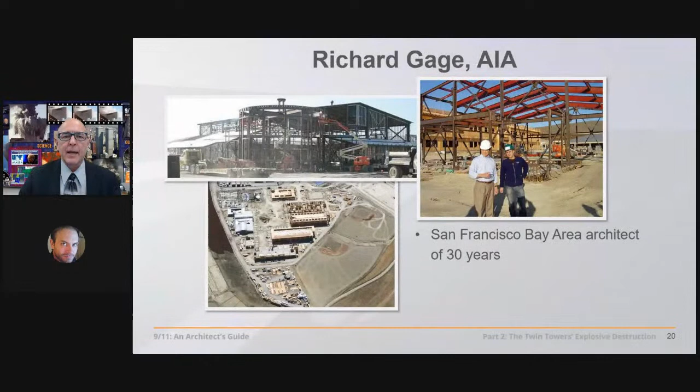Thanks, Andy. And just so people know something about my background: I was responsible at a local firm here in the San Francisco Bay Area for the construction documents for these $3 and $10 million gymnasiums, and the construction administration for this $125 million high school. More recently, before launching full-time into this important outreach effort, I had similar responsibilities working on this $400 million mixed-use project near Las Vegas, with 6 blocks of retail, mid-rise office space, and parking structure—altogether about 1,200 tons of fireproof steel framing.

I now work full-time educating architects, engineers, and others to understand what really happened at the World Trade Center, using the material in these courses. So with that in mind, let's get right into it.

The Twin Towers—some, in terms of its design, called it the crowning achievement of the international style. Others called it heartless modernism. Robert Stern, famous architect, calls it gigantic dumbness, right? You just extrude 2 squares until they become the tallest buildings in the world, outpacing the Empire State Building, which was the tallest building in the world at the time of the construction of the Twin Towers.

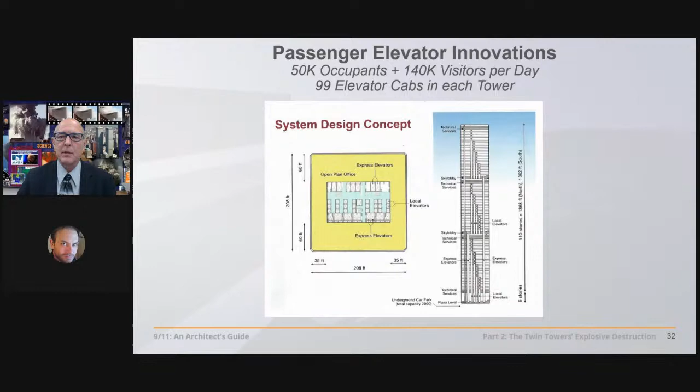That aside, we have some incredible engineering innovations, not the least of which was the passenger elevators, which got 50,000 occupants, with almost 100 elevator cabs in each of these towers, to their destinations in a series of 3 stages. They would go up to the first, second, and third stages. Quite novel—we have an incredible occupant load in these towers that they were designed for.

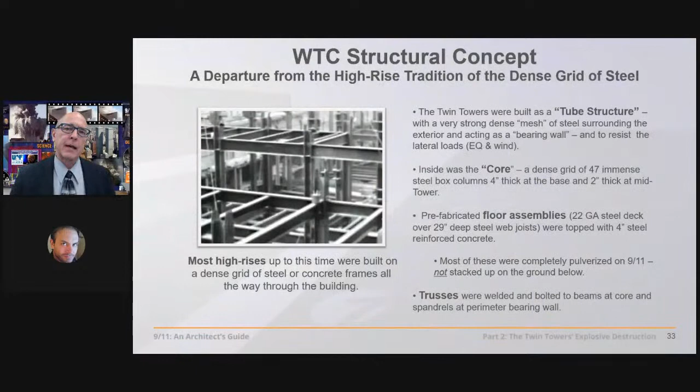Anyway, some said they were empty, half empty near the time of the collapse. But even more impressive is the structural engineering, because up to this time we had a forest of columns in these buildings, including the Empire State Building.

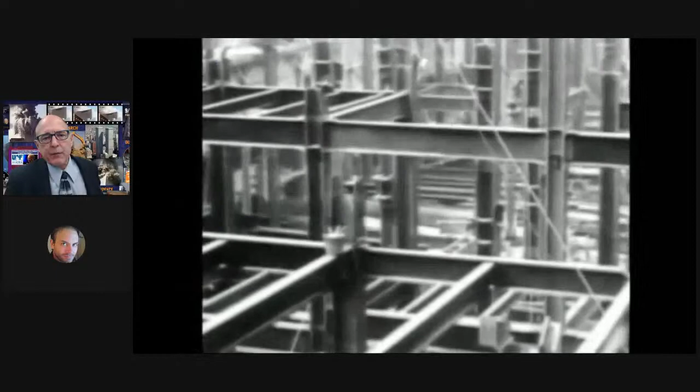But with the Twin Towers, what happens is we have prefabricated elements, 3 columns by 3 spandrel panels welded in the factory, brought out and set with the cranes and bolted in place. They had moved half of the columns out to the outside, as you see here. And then on the inside we had a massive series of 47 incredibly large and robust core columns, up to solid steel at the base. And then between these two different structures really spanned these lightweight steel trusses.

Now, these were the vulnerable trusses, vulnerable to fires, as claimed by NIST, the National Institute of Standards and Technology, who was tasked by Congress to explain these collapses to the American people. So we'll be looking at that in some detail today. Over these lightweight trusses were poured 4-inch thick concrete slabs. So it's really quite a structure.

We're talking about an acre size in these buildings, with 60 feet of open office area on two sides, and 35 feet on the other sides. That in itself was quite an innovation.

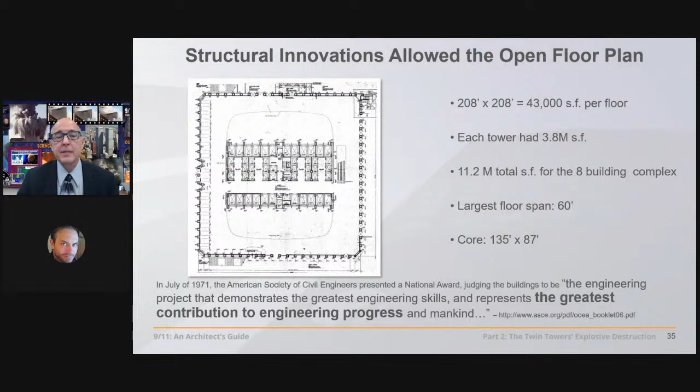As you can see here, most all these floors were open, and they were allowed by these steel trusses. This hadn't been achieved before. That forest of columns really impacted the planning of the tenants' office spaces.

Now, on the outside, what you see is a series of marching columns all the way around the building. In the 80s particularly, these views started increasing without all these columns around the outside as structural innovations continued. So some likened this to a jail cell with bars all the way around, after the 80s and 90s particularly.

It also had lower ceilings than most skyscrapers, at 9 feet here, given the long space particularly. And they were requiring mechanical, electrical, and communications updates in these buildings, and the asbestos was required to be abated. So you had what amounted to a $5 to $10 billion requirement of updating these buildings.

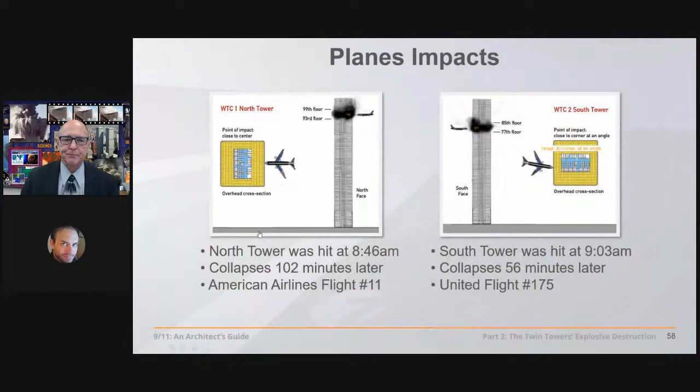So there were investigations into the structural failures here. The American Society of Civil Engineers put together volunteers who worked themselves into subsequent investigations like the FEMA report, which finally had $600,000 worth of funding, but their efforts were quite hampered. According to the New York Times, they couldn't get access to the site, the blueprints of the buildings, the steel, appealing to the public for photos and so forth.

NIST took over the investigation from FEMA, who basically called it a pancaking collapse. NIST took another 3 years and had $20 million worth of funding. NIST is part of the U.S. branch of government under the Department of Commerce, so it's not an independent analysis whatsoever.

Their theory? Column failure. Nearly all the columns failed at once on the outside perimeter of this building, the perimeter structural steel frame. They said that was due to the massive fires at the time of the collapse, causing the floor trusses to sag. When they sagged, they pulled in the columns. The problem is that sagging floor trusses don't cause, can't cause, the pulling in on these 14-inch square steel tube columns.

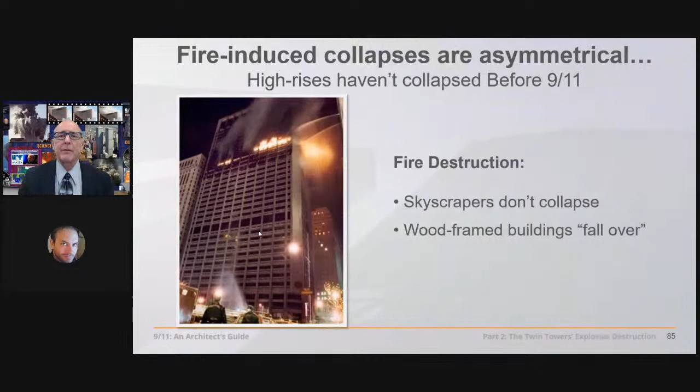We haven't lost a skyscraper, but in wood frame buildings, we'd expect that building to fall over if it was going to fall at all. Not straight down through the path of the tons of supporting structure underneath that's not even on fire, but it might fall over. What about steel frame buildings?

They built an 8-story steel frame building just to see what would happen when they put 2,000-degree fires on it, fueled by incredible fuel loads, trying to get those temperatures up to 2,000 degrees Fahrenheit. They set it on fire, and by the way, some of the steel beams were fireproofed, some of them were not.

And let's see what happened. This was the largest test of its kind ever conducted. It showed how unprotected steel can be distorted, even by a normal office fire. But as is typical in steel buildings, the structural beams only slowly and progressively warped and sagged. There was no chance of a sudden collapse.

In over 20 years, I have not seen, until recently, a protected steel structure that has collapsed in a fire. Until recently, of course, we're referring here to 9/11, when we had not 2, but 3 protected steel structures collapse in one day due to uncontrolled fires, as we're told. So this is getting really important.

The summary of this incredible report says it's inherently stable due to the highly redundant nature of the structural steel form. So the connections don't fail. This is extremely important. As we saw last week, the connections in NIST's computer model failed at a rate of 400 per second.

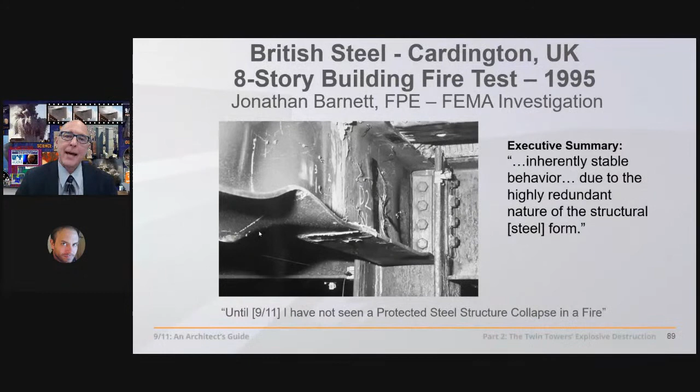The beams might sag when they reach the 1200-degree critical temperature. But there's a history of much hotter, larger, and longer-lasting fires in these structures. Let's take a look.

May 4th, 1988, the First Interstate Bank, a 62-story building in Los Angeles, California, suffered a 3.5-hour fire which burned across 5 floors and caused an estimated $200 million of damage. It did not collapse.

February 23rd, 1991, the One Meridian Plaza, a 38-story building in Philadelphia, suffered an 18-hour fire which burned across 8 floors. The fire caused an estimated $100 million worth of damage and 3 firefighters died fighting it. It was later described by officials as the most significant fire of the century.

It did not collapse. October 17, 2004, the East Tower of the Park Central complex in Caracas, Venezuela suffered a 17-hour fire which spread across 26 of its 56 floors. It did not collapse. August 18, 2007, a fire broke out on the 17th floor of the Deutsche Bank building

in New York, a building undergoing deconstruction after being heavily damaged by debris from the South Tower on 9/11. Originally 41 stories in height, it had been reduced to 26 at the time of the fire, which lasted 7 hours and affected a total of 10 floors. 2 firefighters died of smoke inhalation. It did not collapse.

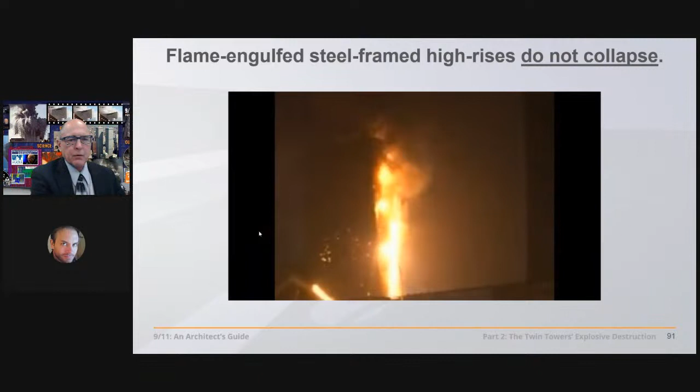So, even after 9/11, we have several fully engulfed high-rises that have not collapsed. Very important precedents. So what happened on 9/11?

These fires brought this building down in a manner in which we're going to be looking at today, fast. You can see why architects and engineers are taking a second look at this, at least.

And here's some natural collapses, in this case, earthquakes. These buildings fall over to the path of least resistance. That's what we might expect in a natural collapse. The law of entropy, increasing chaos, it falls over. But the columns and beams are not severed one from another. The concrete is not pulverized to a fine powder, as we'll see happens at the Twin Towers.

These buildings exploded. We have thick, billowing, enormous pyroclastic-like clouds of pulverized concrete expanding at an incredibly rapid rate in cauliflower-shaped forms due to the intense heat from the explosives. There's a solid edge on the outside. This is due to the rapid expansion.

We have witnesses that hear sounds of explosions. They see flashes of light. If we have these features, we know we have explosions. So we'll be looking for those features at the World Trade Center. And some of these features as well, because we can harness explosives quite effectively to bring down high-rises. In fact, this is the method used to bring down high-rises almost universally.

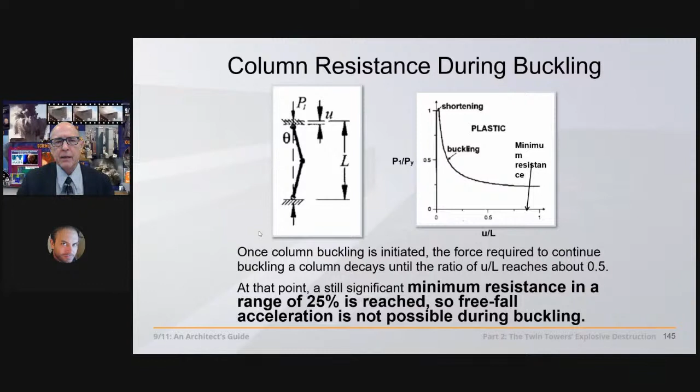Now, we would expect something else, given what we know about steel columns, that even when they buckle, they still have resistance. The resistance never goes to zero. In this case, 25% minimum resistance is reached. So free fall acceleration is not possible during this buckling. And yet we have darn near free fall, and it shouldn't be possible.

We'll go into that. Feature number 2: are there patterned explosions and flashes of light heard and seen by witnesses?

Well, the oral histories show that the first responders talked exactly about that. Their testimonies were taken in October and September to preserve those accounts before they became reshaped by collective memory for the city fire commissioner. So of the 500 recordings, which were finally ordered released not until August of 2005 by the New York State Court of Appeals, that forced the city of New York to release these to the New York Times.

What did the New York Times find and publish in terms of the transcripts? 12,000 pages of transcripts gone through very carefully by Professor Graeme MacQueen in Canada. What did he find? Initially 118, subsequently many, many more.

Firefighters observing sounds of explosions, seeing flashes of light, and other phenomena of explosive demolition.

Let's look at a few of them. We felt the ground shake. You could see the tower sway, and then it just came down.

Again and again, with respect to these testimonies, you're going to hear the order of events. They're seeing this phenomena, they're feeling this phenomena, they're hearing this phenomena, and then the towers come down.

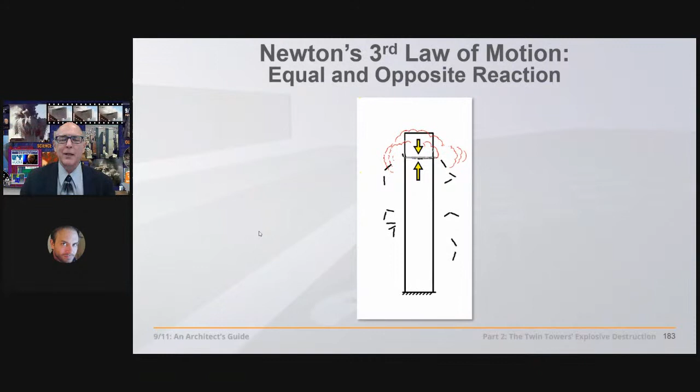NIST says the top part drove the rest of the building down to the ground and then destroyed itself. Well, wait a minute—there's a law here, Newton's third law of equal and opposite reaction.

When you run two bodies into each other, there's equal and opposite destruction. Does it matter if we drop the lighter one onto the heavier one? No. The lightest part of a structure—and these are virtual pyramids, because you need all the weight at the bottom to support the building—can't possibly destroy the heavier, cold, hard, intact steel below.

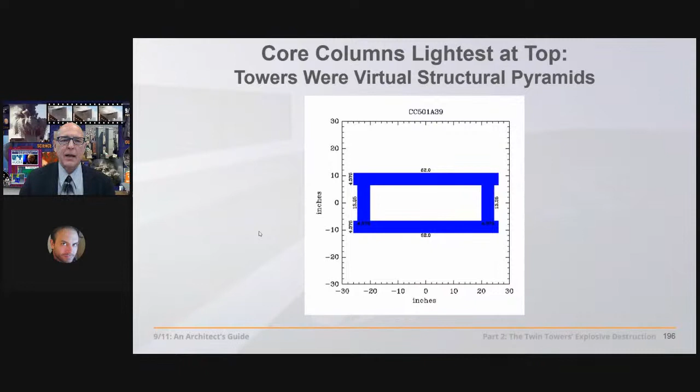At the top, you might have 3/8 inch thick structural steel columns, and as you go down they get heavier and heavier. At mid-height, 2 inches thick and 32 by 16 inches. And at the bottom, they're virtually solid steel. So no, the top part can't destroy it.

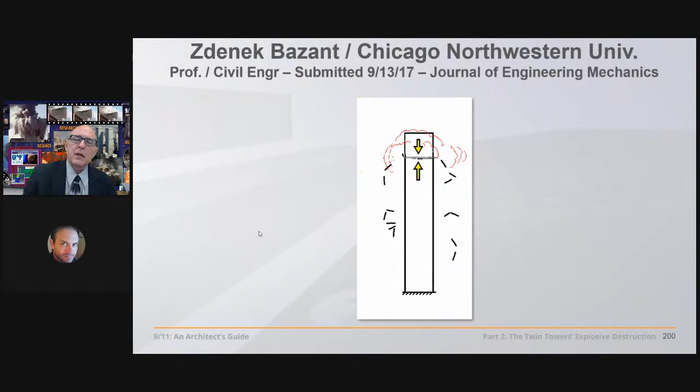But this is a theory that came from Zdenek Bazant of Northwestern University, a structural engineer who submitted this paper—a very complex paper—just 2 days after 9/11. It's called his crush-down, crush-up theory. Everybody else is in shock trying to figure out what's happening to our country, to New York and DC, and here this guy's just cranking away calculations that must have taken a whole lot longer than 2 days. But that's speculation on my part.

His formulas are correct, but the input data is false. Let's look at it—there are 6 key errors. One is obfuscation.

You can't decode it, although there have been structural engineers who have, and we're going to be looking at their work. Second, they completely eliminate an entire story of columns at the point of jet plane impact, as if all those columns were damaged at once. We know that's not the case, because NIST just says a few of them were damaged. But in order to get a false dynamic load, they simply vanish.

280 columns—they double the mass of the section of building up above. They decrease this column strength below by 3 times, and they decrease the velocity loss that would be due to the conservation of the law of momentum. Then, on top of that, they eliminate the column reserve strength. These columns are 3 times stronger than they ever need to be.

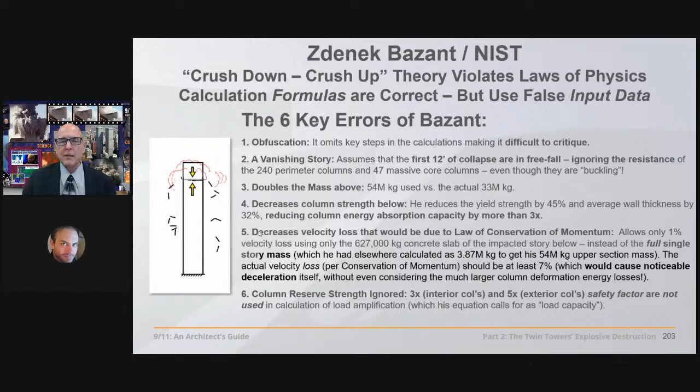So with all that, we have the results of these errors rigged 12 to 1 in favor of a collapse, at a minimum—it's much more than that actually. So they force the building to collapse in his 4-page paper.

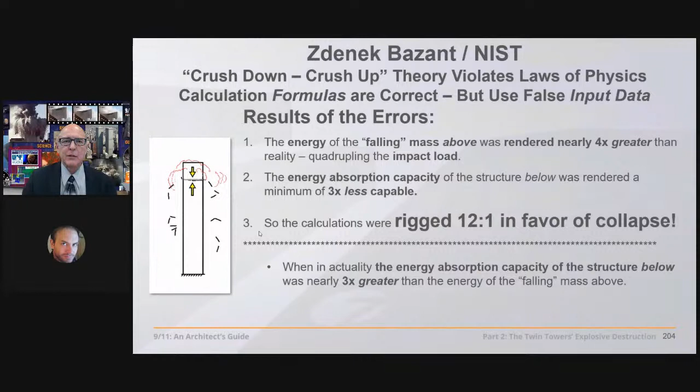So this is fraud, and this fraud is actually countered by the actual measured data. The measured data shows that it comes down nearly at free fall, which Bazant also was trying to support. But in reality, if you didn't have controlled demolition, Chandler's calculations show that the downward movement would have been arrested after 2 seconds in a natural collapse.

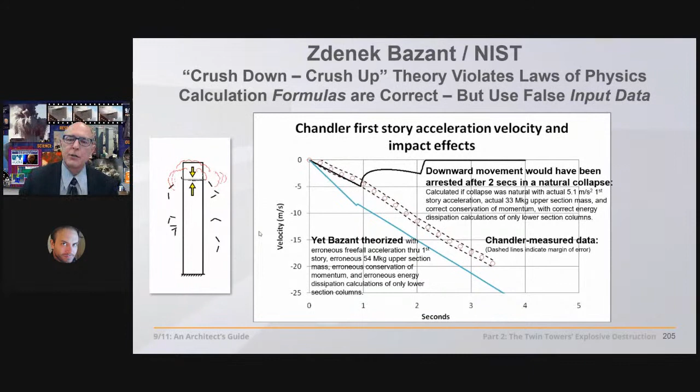So we have time on the bottom, velocity on the side. The velocity stops after 2 seconds, even if there was an initial impact.

These key errors are refuted in peer-reviewed papers submitted by Tony Szamboti and Richard Johns, and to the American Society of Civil Engineers—this paper by Gregory Szuladzinski, Richard Johns, and Tony Szamboti in 2013. But the errors in Bazant's original paper were upheld. They will not publish these additional papers. Why? They say it's out of scope.

Well, how is it out of scope for one group of engineers to submit and expose the errors of another group that was already published? That's what you do in peer review. So this is fraud, and it is being challenged today with an ethics complaint. We can't get into that.

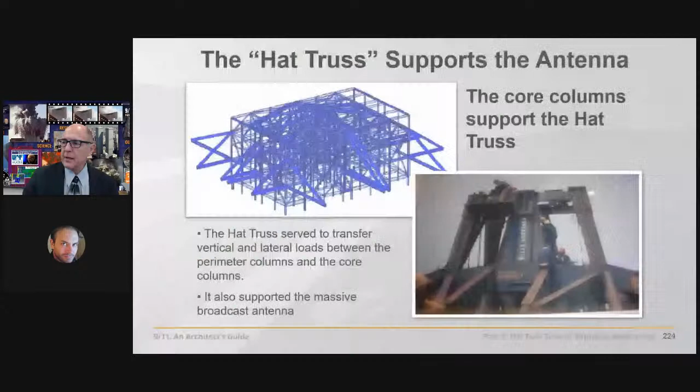Well, what does the antenna sit on? The antenna sits on the hat truss. What does the hat truss sit on? The hat truss sits on the core columns.

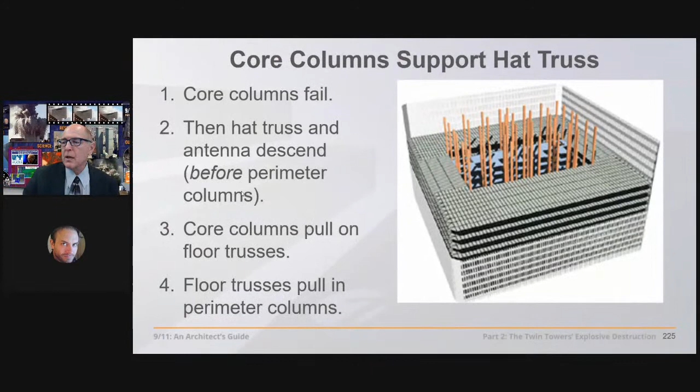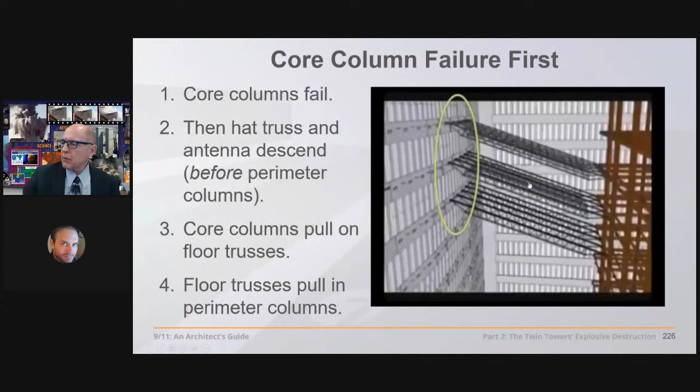So something's happening to the core columns that causes the hat truss to descend before the perimeter columns descend or bow in inwardly. So the core columns are pulling on the floor trusses, and then the floor trusses are pulling on the perimeter columns, like you kind of see in this not so accurately put together animation from, I think, Nova. But the concept is still there: the core columns descend and then pull on the floor trusses, which are pulling on the perimeter structure.

And nowhere in any of the photographs or videos do we see a pile driver, an upper section that, as we're told by NIST and Zdenek Bazant, drives the rest of the building down to the ground. As we already saw, it's being destroyed in the first 3 seconds.

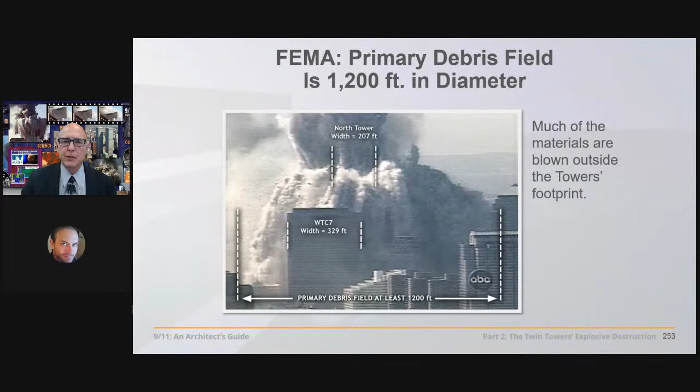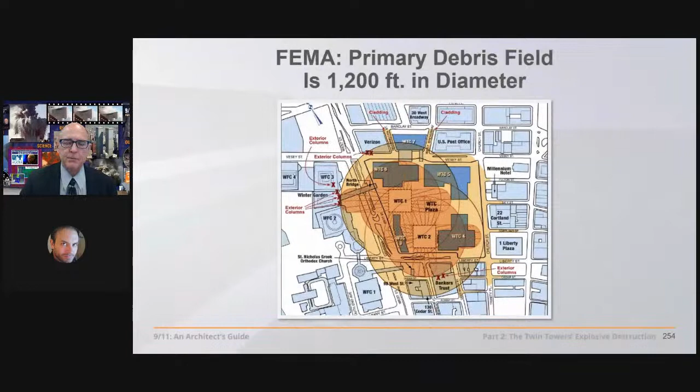And we'll show you how fast it's coming down. This is a 1,200 foot diameter debris circle around this building. The towers are only 207 feet wide, and yet debris is found up to 1,200 feet in diameter around, well outside the perimeter of ground zero, completely destroying the Winter Gardens from the World Financial Center, 600 feet away, and well outside the perimeter of the structure, as you see outlined here.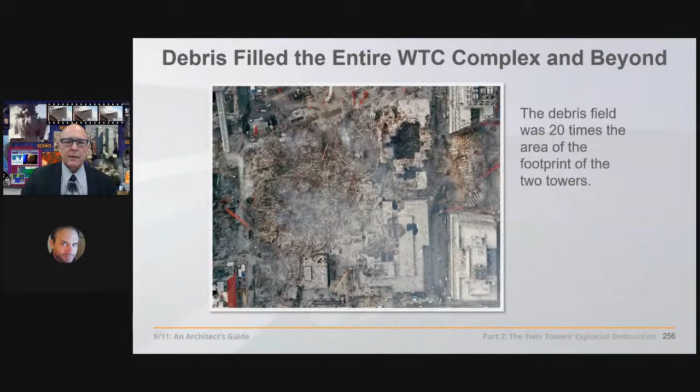The steel frame is completely broken up as well. Compare that to the nice, neat pile that we looked at last week in this three-part series. Building 7, a classic implosion. Very neat, if you will. Nice, neat pile.

But the debris field of the Twin Towers is 20 times the area of the footprint of the towers, indicating a very explosive destruction. By the way, if 100,000 tons of steel is distributed outside the footprint, and I mean 600 feet outside the footprint.

300 to 600 feet, then we have to ask ourselves, what's crushing the building? This is a third of the weight of the building. You say, oh, well, it must be the concrete floors. We'll come back to that.

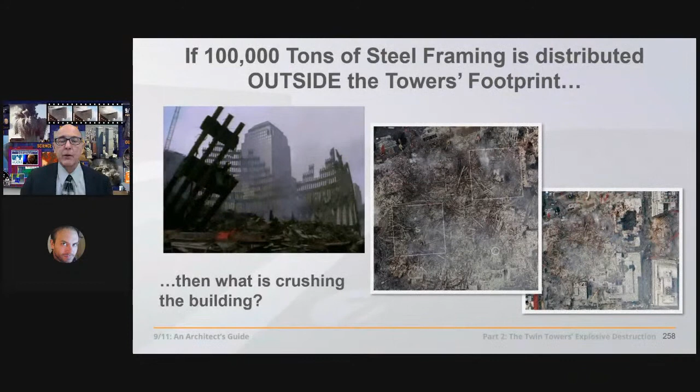Also, if it was puffs, air pressure being delivered through the open office space, it would come out in the open office planning and blow out all those windows as the air pressure equalized, or blow out none of them, but not these highly focalized, pinpoint accurate, violent ejections occurring at what appear to be engineered locations.

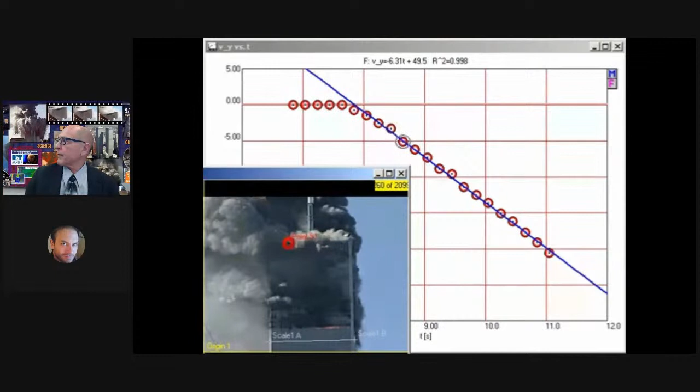First note that there is a sudden onset of collapse, as the point we are tracking makes a sudden transition from being at rest to an approximately constant downward acceleration. The slope of the graph indicates that the acceleration is 6.31 meters per second squared downward, which is 64% of free fall.

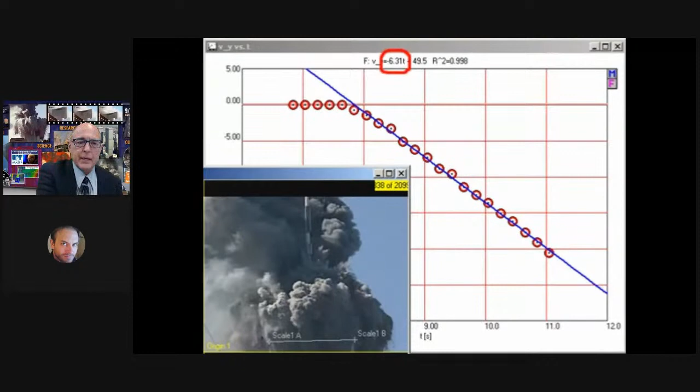Well, what's it falling down through? It's falling down through this: 90,000 tons of structural steel in each of these buildings. More steel on the face of this building than glass, at near free fall acceleration, as if it weren't even there.

Let's look at it this way. On the right, we have 15 stories of structural steel identical to the steel in the Twin Towers, a steel frame building, part of a building. On the left, we have the same exact structure, and we put over it, say, 70,000 tons of structural steel, just like the towers. And we'll even give it a dynamic load.

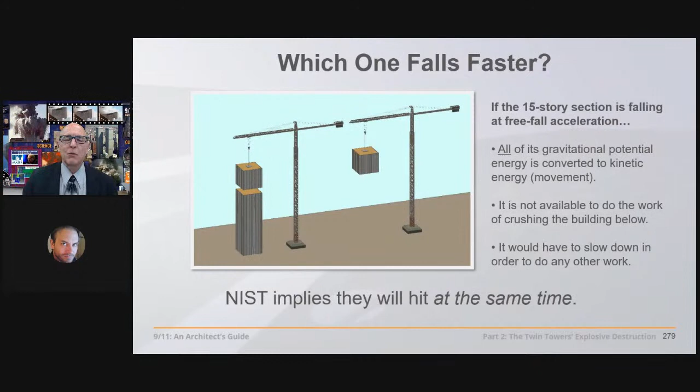We'll vanish those columns like Zdenek Bazant did in that study to give it an impact. We let go with these giant cranes at the same time. What happens? Well, this is 7th grade physics. This can be figured out very intuitively. The structure on the right is going to fall at free fall acceleration. The structure on the left is going to impact and slow down.

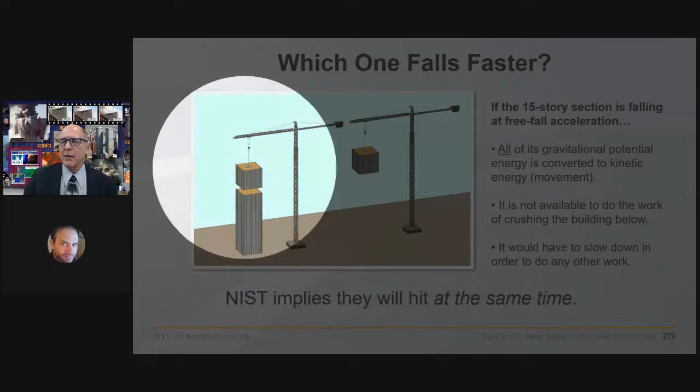But that's not what happened. It didn't slow down on 9/11. It went faster and faster and faster straight down through all of that structure.

Here's another way to look at it from Massimo Mazzucco's September 11th, New Pearl Harbor. Something of this kind is what we should have seen when the top section of the towers collapsed onto the lower one. The upper and lower sections should have mutually destroyed each other until all the energy is dissipated and the system comes to rest. Alternatively, as shown in this experiment with two towers made of snow, the top section could have fallen off to the side after the initial collapse.

What could not have happened is this. A little tiny chunk of the building can't possibly fall and crush the entire structure below it. This is such a simple, fundamental concept that architects and engineers were astonished in seeing it totally ignored by NIST. This is high school physics, and our whole society is being led to believe that these fundamental laws of physics, hard science, don't apply anymore.

But they do, of course, and this is why we did succeed in getting one of the third peer-reviewed papers published in the Journal of Protective Structures by Gregory Szuladzinski, Anthony Szamboti, and Richard Johns. So that was not the American Society of Civil Engineers. So let's look at the structural steel frame and what happened to it, because the National Fire Protection Association Guide 921 for fire and explosion investigations is the leading authority on the subject for these investigations.

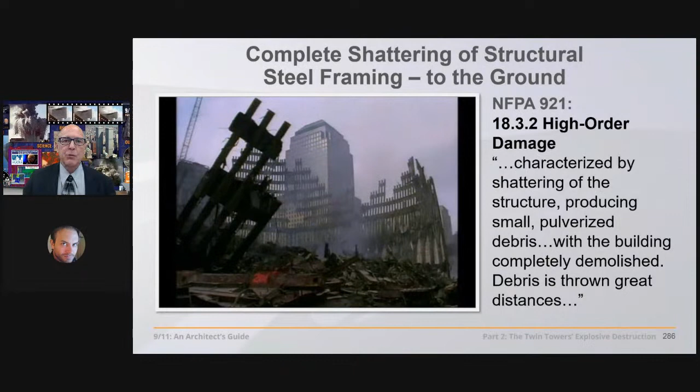And they say, look for shrapnel effects under effects of explosions, characterized with high order damage, the shattering of the structure, producing small pulverized debris with the building completely demolished, debris thrown great distances, which is exactly what we have in the Twin Towers. So it should have been a clue to NIST to examine explosive demolition here. It's shattered into its 37.5-foot lengths, these columns ready for loading and shipment.

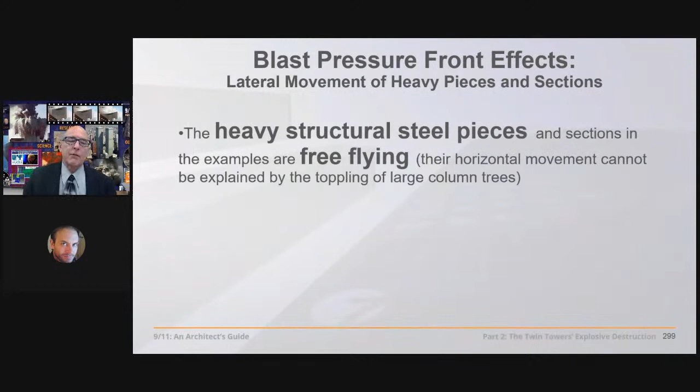How about lateral ejection? A really important topic also, because the NFPA 921 investigation guide says look for blast pressure wave effects. Heavy structural steel pieces and sections freely flying, they say, which is exactly what we have. Freely flying structural steel sections landing 300 to 600 feet in every direction.

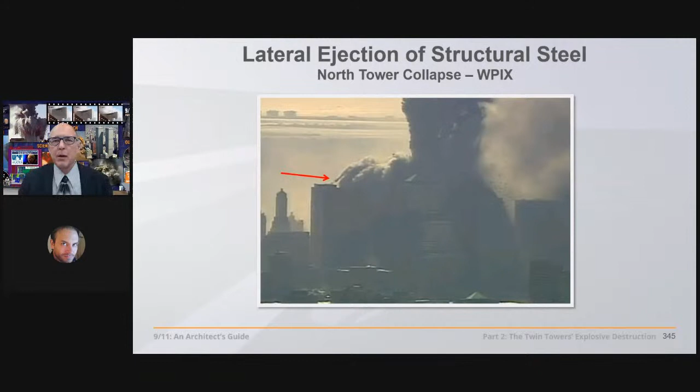Structural steel is not flammable. We'll go into what that might be, or clearly the evidence shows it to be, in part 3 of this series next week. In the meantime, let's look at the physics of these lateral ejections from physics teacher David Chandler.

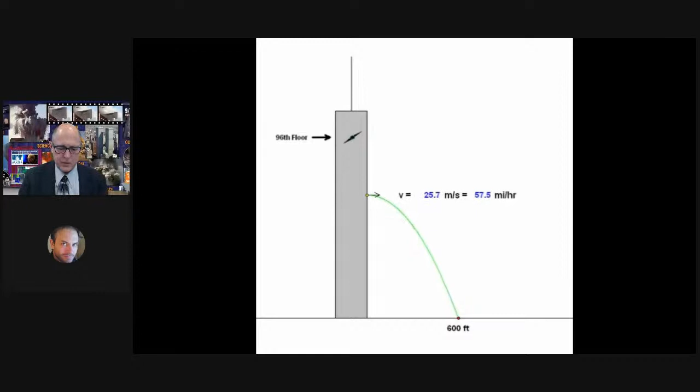Girders weighing several tons were found 600 feet from the base of the North Tower. How fast they were ejected depends on where they originated. If they came from high in the building, they were thrown outward at about 50 miles per hour. If they came from lower down, the speed had to be even greater. Gravity alone cannot account for such high lateral ejection speeds.

I'm here measuring the horizontal speed of what appears to be one or more wall units, which are being thrown northward from the North Tower. Because it was recorded by a handheld camera, I had to first stabilize the image. Then I did the measurements from the stabilized version of the video. Final result, 35 meters per second, which is 78 miles per hour.

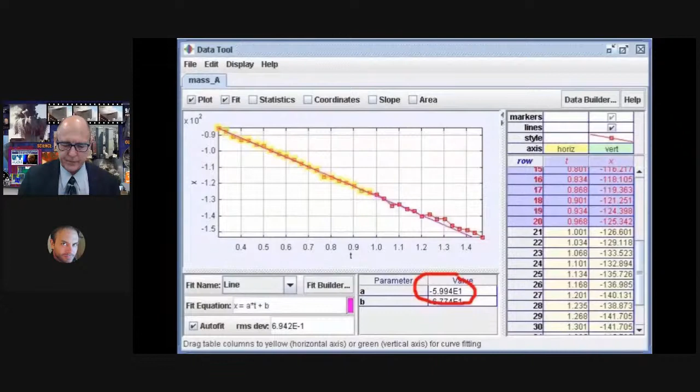This is enough energy to hurl a 200-pound cannonball 3 miles. And there are hundreds of these sections that have been hurled.

So let's look at the concrete. We have 110 floors, each an acre in size, 4-inch thick and 8-inch thick concrete. But we don't see 50 of them. We don't see 10 of them. We don't see one of them in the photos available to us in the aftermath of the destruction here.

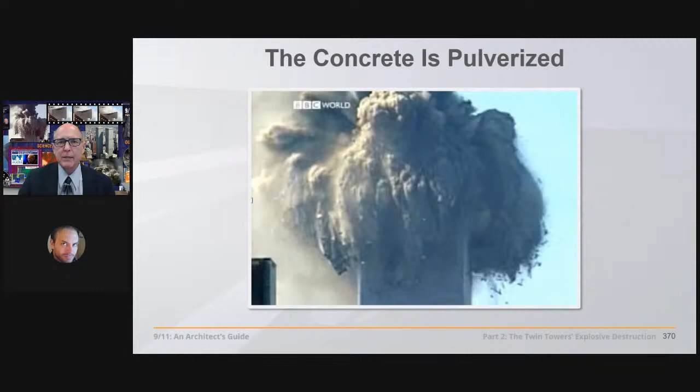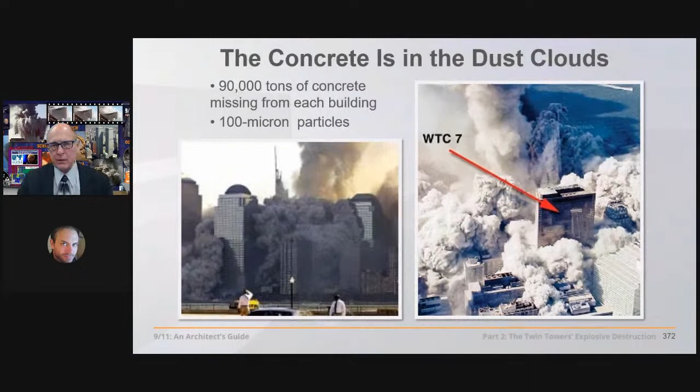Oh, here it is. 90,000 tons of concrete pulverized in midair. All the photographs and videos show exactly these incredible pulverized clouds, pulverized to 100 micron particles, as the dust studies show from the U.S. Geological Survey, covering downtown Manhattan with a blanket of 3 and 4-inch thick dust. Studies show 30% of this powder is pulverized concrete, spread over a 3 square mile area.

Let's listen to the governor.

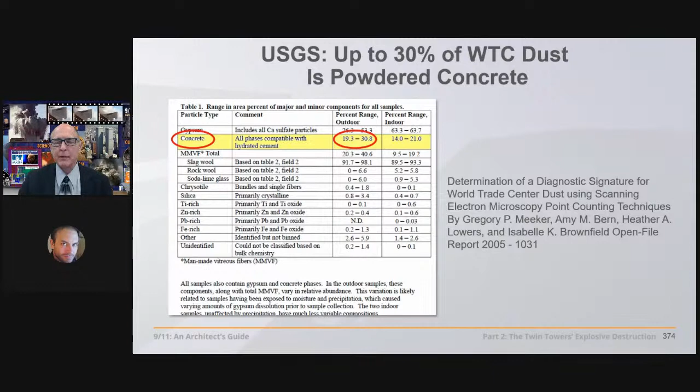And you see, there's no concrete. There's very little concrete, all you see is aluminum and steel. What happened to the concrete? It was pulverized. I was down here Tuesday, and it was like being on a foreign planet. All of lower Manhattan, from river to river, there was dust, powder, 2-3 inches thick. The concrete was just pulverized.

You have two 110-story office buildings. You don't find a desk, you don't find a chair, you don't find a telephone or a computer. The biggest piece of a telephone I found was half of the keypad, about this big. The building collapsed to dust.

What I expected to see was nothing like what I actually did see at the time of my arrival at the site. There wasn't much that you could describe. Everything was dust and metal. There were no typewriters, no chairs, no nothing.

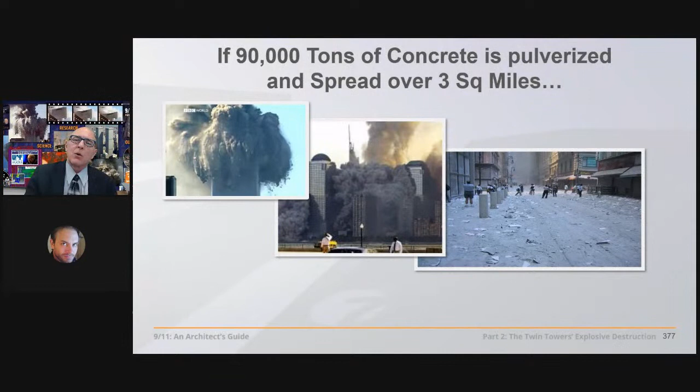If 90,000 tons of concrete was pulverized and spread over 3 square miles, what percentage of that concrete was available to crush the building? Like 0.001%, maybe 1%.

So the steel wasn't crushing the building, the concrete's not crushing the building. Together, this is two-thirds the weight of the building. What's left to crush the building? Think about it.

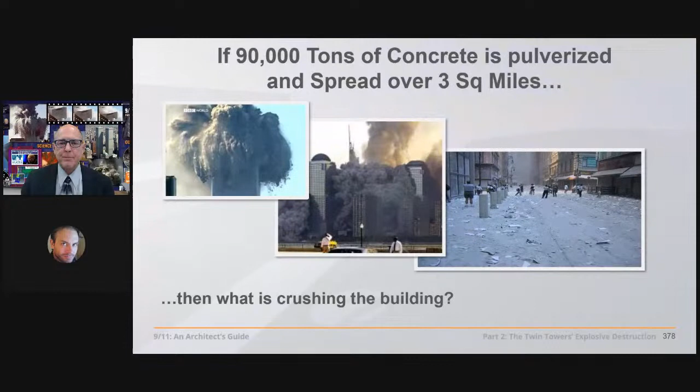We had maybe 10,000 metal filing cabinets, but they could only find one. It survived because it was in the basement—it's from an ice cream store. An incredible degree of pulverization. Speaking of which, what happened to the victims?

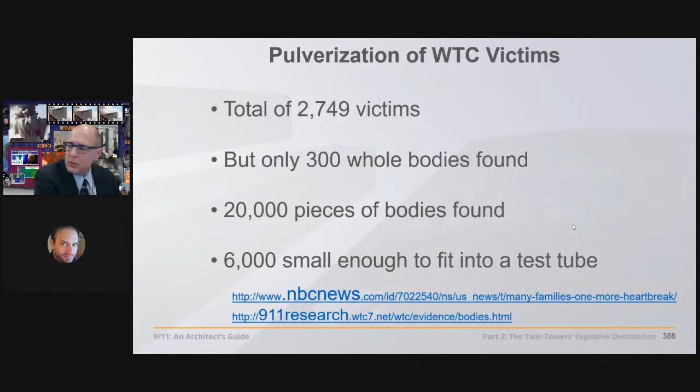There were 2,749 victims, but only 300 whole bodies were found. 20,000 pieces of bodies found, 6,000 of them small enough to fit into a test tube. And yet 200 pieces matched to a single person. And 1,151 victims remain completely unaccounted for. How is that even possible? They were vaporized.

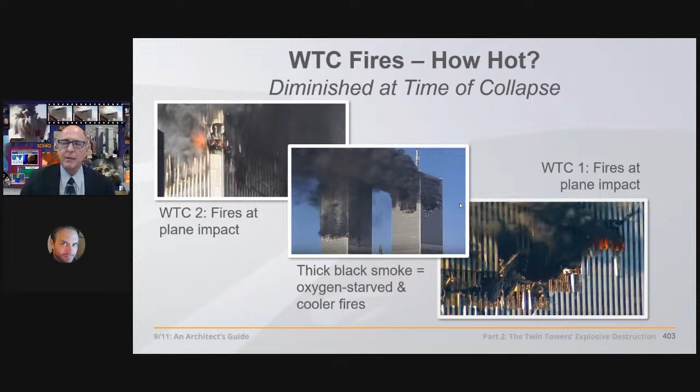Fire doesn't create these features, any of them, let alone all of them. Fires cause structures to fall asymmetrically, gradually—but there's no precedent in high-rise steel frame office buildings, especially fires like these, which were severely diminished at the time of the collapse, indicated by the oxygen-starved, thick black smoke.

So, with testimony of the first responders, we now have 156, after a more careful review, of those citing evidence of explosions. This review by author Graeme MacQueen.

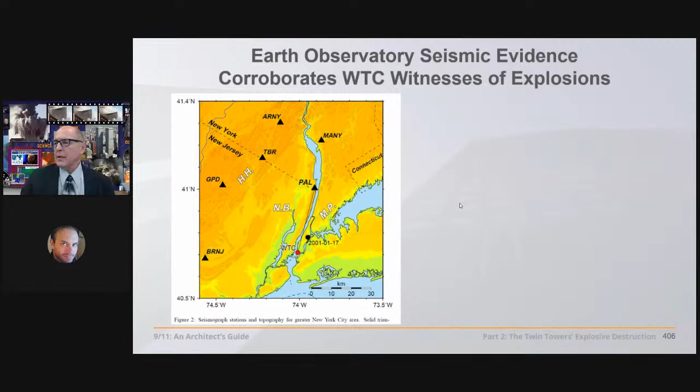And another witness to this set of tragic events was the Lamont-Doherty Earth Observatory.

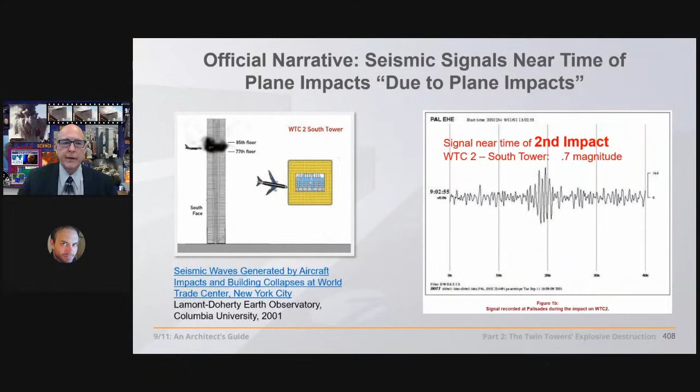Well, let's look at it more carefully. In the North Tower, we have the seismic event at 8:46 and 26 seconds. But the plane doesn't arrive until 14 seconds later. So how can the plane be causing the event 14 seconds earlier? This is per the NTSB, National Transportation Safety Board radar, that the 9/11 Commission relied on—it's accurate to within a second. So what is NIST going to do with this discrepancy?

Well, they say, we looked at the videos and we think the plane arrived 10 seconds earlier than the NTSB radar. Okay.

You're still 4 seconds off. What are you going to do with that? Well, they went to Columbia University and got them to move their data back 3 seconds, which put them in the ballpark.

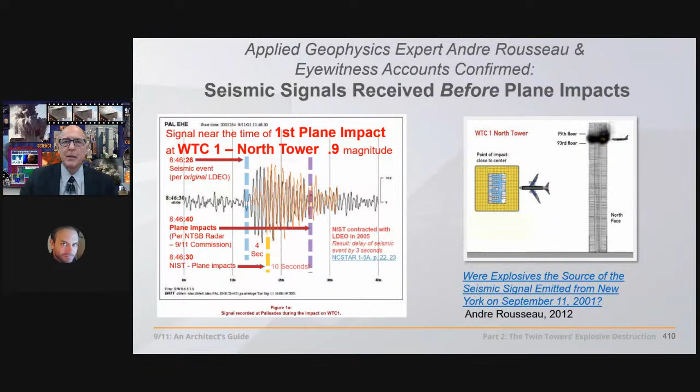What kind of science is this? Hey, the same thing happens at the South Tower. The seismic event occurs at 9:02 and 54 seconds, but the planes don't impact until 17 seconds later. NIST says, oops, we looked at the videos and we don't think the plane impacted then. We think it impacted 12 seconds earlier.

Okay, you're still 5 seconds off. What are you going to do? Go back to Lamont Doherty and get them to move this set of data back 3 seconds also, which they say puts them in the ballpark.

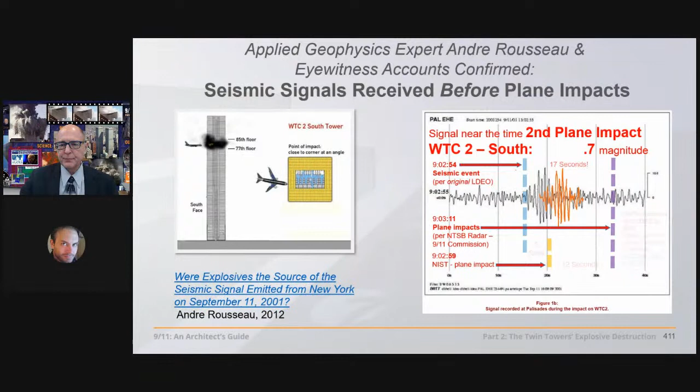We don't get the report from Columbia University, which says it was produced, but it's private, privately contracted between NIST and Columbia University. No reasons given as to why these data sets are moved back.

Well, what could be a possible reason for these earlier events? Let's go to Mike Pecoraro. So the whole building seemed to shake. There was a loud explosion in the basement. When they got to the C level, they found the machine shop gone. Nothing there but rubble. Talking about a 50-ton hydraulic press, gone. The two made their way to the parking garage, found that it too was gone. No walls. There was rubble on the floor. Couldn't see anything. The steel and concrete door weighed 300 pounds, wrinkled up like a piece of aluminum foil lying on the floor. A bomb had gone off in the building,

in the basement, which is not a part of the official story. And neither is this. Witnesses of bombs in the building before the plane impacts.

Was the janitor. Like I said, on that day, there was an explosion on the basement, and this is prior to the building got hit by the plane. And then the plane hit. I think a bomb went off in the lobby first, then a plane hit the building. The bomb hit the lobby first, and a couple of seconds in the first plane hit. So bombs going off in the lobby and the basement before the planes actually hitting. This is was a janitor.

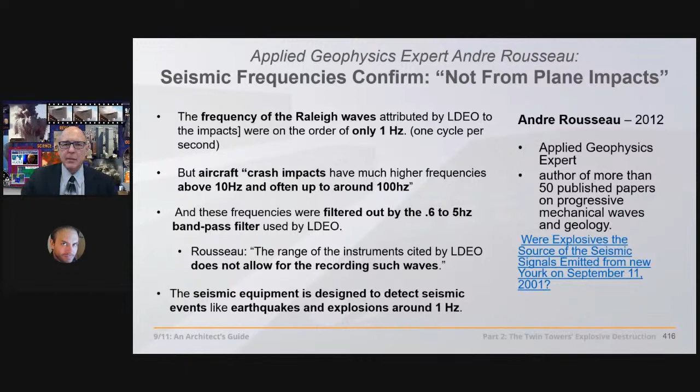He says the range of the instruments doesn't even allow for recording such waves. The seismic equipment is designed to detect seismic events like earthquakes and explosions around 1 hertz. So, he says the seismic signals are not from the plane impacts. The actual waves generated by the crash had to have been deadened before hitting the ground, even.

This is like a flagpole. You know, it's flexible up top. The building swayed after it was impacted. So let's go to the building collapse itself, the first collapse.

Because there were seismic events, in this case, a 2.1 magnitude earthquake at the South Tower, which the official story claims was due to the debris hitting the ground. And we have a 2.3 magnitude earthquake at the North Tower, again, attributed to the debris hitting the ground.

But slow down, let's take a look. The surface waves arrive at 10:28 and 31 seconds from the North Tower. But the tower starts its descent 9 seconds earlier, and the first debris doesn't even strike the pavement until 1 second later, and the heaviest debris striking another 4 seconds later. So how can the building hitting the ground cause the event?

Well, NIST has an answer to that. We looked at the videos and we think, in this case, they contract yet again a third time with Lamont Doherty Earth Observatory, finding that the seismic waves, getting them to move their data back 3 seconds. So that's a real problem.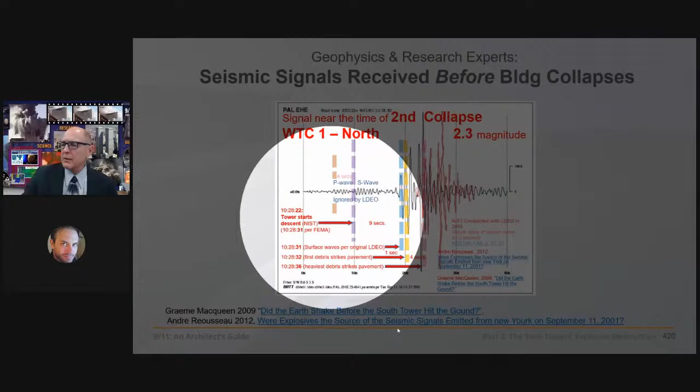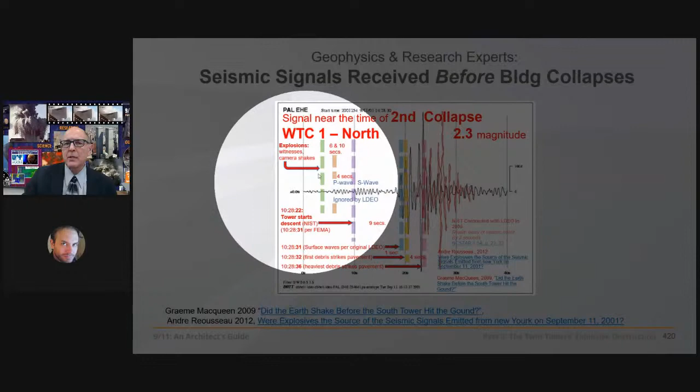So let's look and see what might be causing these waves, 6 seconds earlier and 10 seconds earlier. Remember the witnesses of explosions before the tower came down? Well, here's another witness. It's a camera on a tripod. It shakes 6 seconds before the collapse. Something shaking that tripod - let's take a look.

So we're still, and there's the big shake on the tripod. I'm not shaking this camera. It shook, and then we have a big explosion on the top, and then the building comes down 6 seconds after the shake.

And again, we have another camera from Etienne Sauret on the North Tower shaking 10 seconds before. So the camera is set up on the roof of an adjacent building with a great view. And here's the shake, and there's the explosions on top. And then the building comes down at the 10-second mark after the shake.

So that's really important. So let's look at the numbers here. In the case of the South Tower, we have the start of the seismic event at 9:59 and 04 seconds. Now the start of the tower collapse, even per NIST, is 5 seconds earlier. And then the first debris doesn't hit the ground until 7 seconds after the start of the seismic event. So how is NIST going to explain this one?

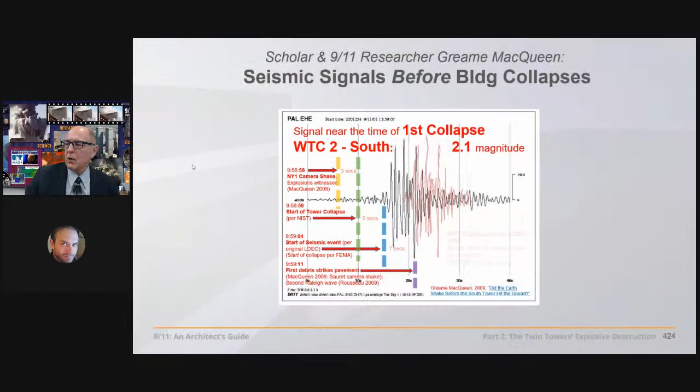This one's more subtle - New York TV station 1, New York 1. And here we go, watch carefully. There's the shake - 3 seconds later, and the collapse begins. So you can check this work out, the excellent work of author Graeme MacQueen.

It's claimed that the debris is hitting the ground causing the shaking, but let's look at this. The concrete floors are not even hitting the ground, right? They've been turned to powder, pulverized dust, spread over 3 square miles. So there's no contribution to the seismic event from the concrete powder.

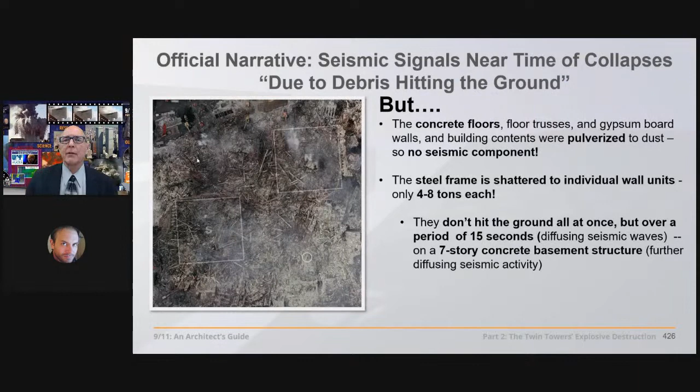The steel frame is shattered to individual wall units, 4 to 8 tons each, peppering the ground over 15 seconds - not even the ground, but the top of a concrete slab, which is the plaza or the top of the parking structure. And it's equally distributed over the entire World Trade Center superblock and beyond. So there's no seismic component from those elements.

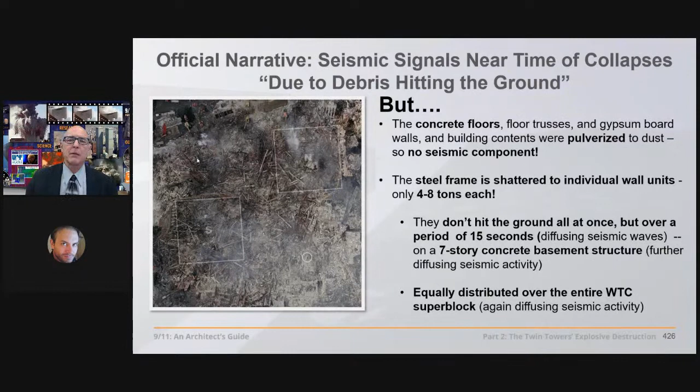In addition to this, look, we have 2 identical collapses from nearly identical buildings, but one of them is producing a seismic strength 1.6 times greater - 2.1 on the magnitude versus 2.3, due to the logarithmic scale of the Richter scale - 1.6 times greater in the North Tower. So how can that even be explained? Andre Rousseau says identical buildings and nearly identical collapses can't possibly produce seismic events of extremely different energy releases on an order of magnitude. That makes sense.

Well, you can review this seismic evidence also at the Consensus 9/11 panel put out by Elizabeth Woodworth and David Ray Griffin, professor, who documented very carefully in point TT7, 'Why did the Twin Towers collapse? The seismic evidence.'

And by the way, some people in error try to compare the Twin Towers to the Seattle Kingdome. This is apples and oranges. The Seattle Kingdome is a 25,000-ton concrete roof which impacts the ground virtually at once - versus the peppering that we just talked about and the lack of chunks of concrete.

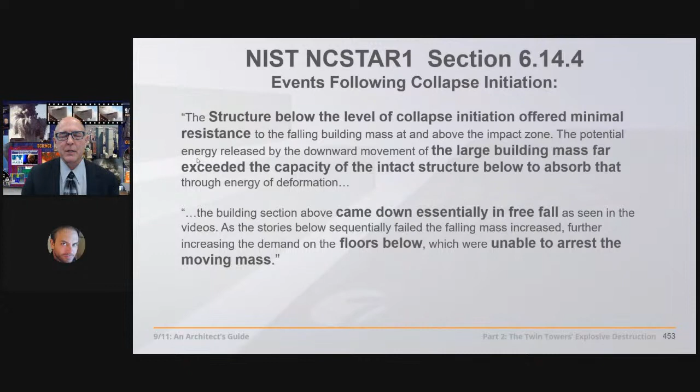10,000 pages, $20 million of our money, and you have only a half page trying to explain the actual collapse? Well, what does it say? Structure below the level of collapse initiation offered minimal resistance. The large building mass far exceeded the capacity of the intact structure below to absorb that through the energy of deformation. Came down essentially in free fall. The floors below were unable to arrest the moving mass. They have a lot more questions here than answers, a lot more speculation than analysis.

It's a pre-collapse report. It should have been titled Final Report on the Initiation of Collapse of the World Trade Center. So we submitted a request for correction, which you can do under the Data Quality Act.

Challenge faulty reports from governmental agencies. And they write back, we were unable to provide a full explanation of the total collapse of the Twin Towers. Yeah, or any analysis whatsoever. They did say NIST found no corroborating evidence to suggest that explosives were used. Oh, well, they admit a year later in writing that NIST did not test for the presence of explosive residue. You won't find what you won't look for.

What do the experts say? At least those experts without financial or political obligations that might sway their objective opinions in the matter. William Rice: the prevailing theory would have us believe that each of the Twin Towers inexplicably collapsed upon itself, crushing all 287 massive columns while maintaining a near free fall acceleration, as if the 80,000 tons of supporting structural steel framework underneath didn't even exist.

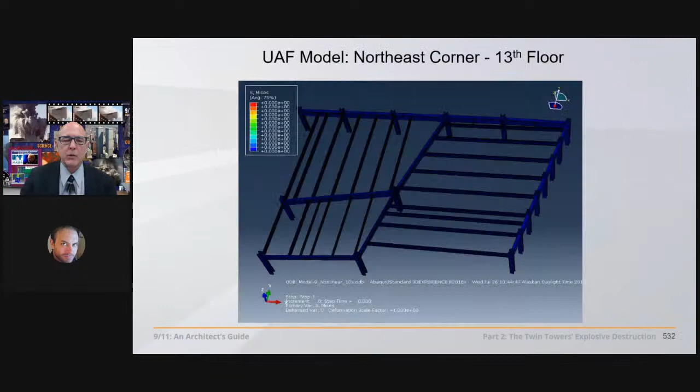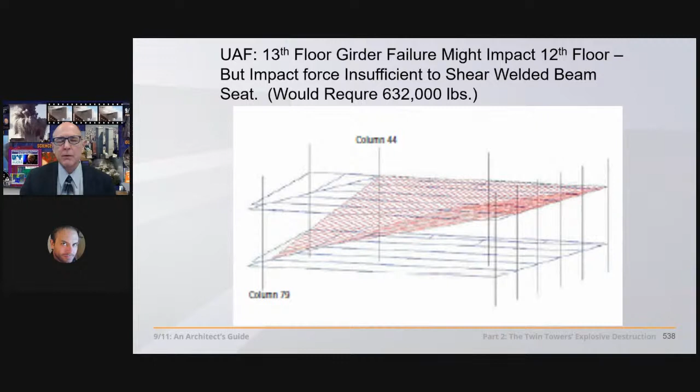Tell them about the World Trade Center 7 evaluation, which Professor Hulsey has done an extraordinary 4-year analysis of Building 7 and concluded that the building could not come down by fire, as NIST claims. So it's all there, and we want you to get this information out for us. The 137-page report - you can walk it to a structural engineer and say, have you seen this? This is incredible, it's a 47-story skyscraper. According to the University of Alaska at Fairbanks, it did not come down by fire.

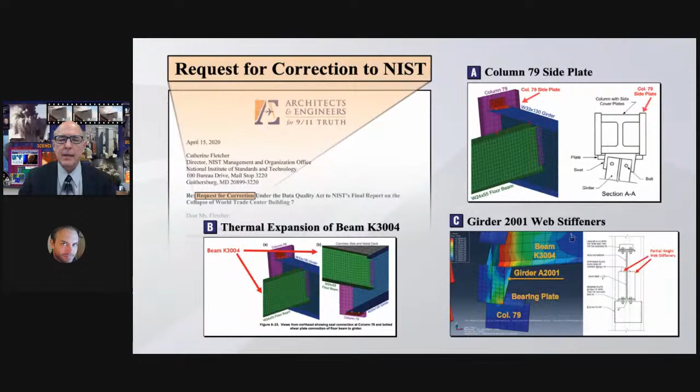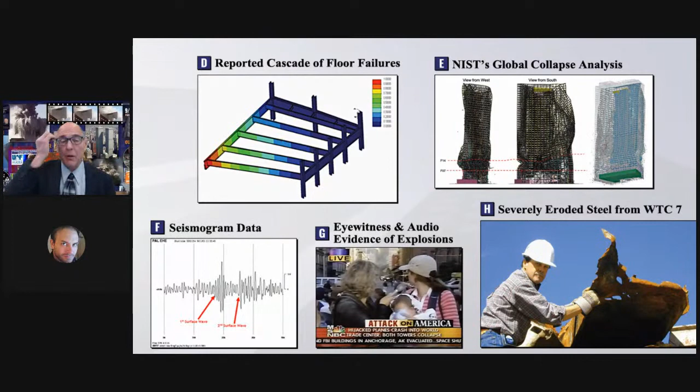So we have a request for correction submitted to NIST, and it highlights the key problems they had with their report on Building 7, which is buttressed by the Leroy Hulsey study, and points out all the fraud - not all of it, but the key points of fraud. I mean, we'd be here all day naming all the fraud that NIST has committed here. We're taking that to Congress. How do we do that, Andy?

That's right. This is the Bobby McIlvaine World Trade Center Investigation Act. If you're not aware of it already, it's named after Bobby McIlvaine, who died entering the North Tower on the morning of September 11th. He was actually killed by an explosion right there in the lobby, which immediately calls into question the official story we've been given. So we've named the act after him. His father, Bob, has worked with us for years. And what it would do, as it says here, is establish a select committee.

It can be passed in either house of Congress. That would look into the evidence that Richard has been going over tirelessly since 2007, 2008, when the organization was founded. But it would do more than just have NIST come out and give Congress a bunch of talking points. It's actually written in the legislation that they have to look into controlled demolition and the hypothesis that Richard has put forth.

So how do you get involved? Well, very simple. You let your congressman know that you want them to support this. Now there's a couple of ways you can do it. You can call them on the phone and say that you support the Bobby McIlvaine Act and that they should as well.

You can also go to ae911truth.org/justice. You can download a packet that has the act in it, along with some letters from Bob McIlvaine and Richard. Next time your congressman is not afraid to face you in these current times, you go and hand it to them, or you can email it to them as well, put it into a PDF attachment and email it to them. If you don't have time for all of that, you can simply put your address and your zip code, and there's a letter that's automatically generated for you.

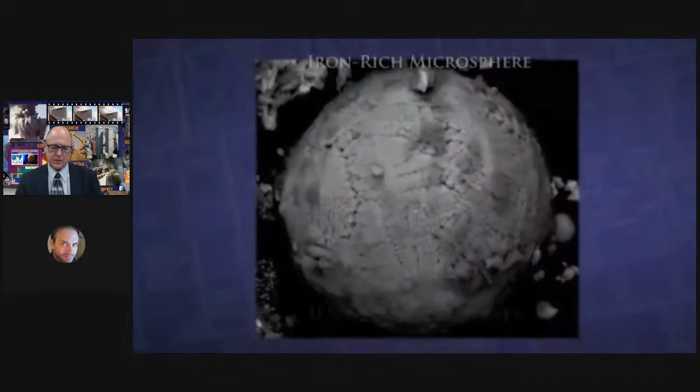In an office fire, you cannot generate enough heat to melt steel. There were these iron microspheres present in all of the dust samples. They needed to have been formed in extremely high temperatures. All the characteristics of the microspheres, along with what I see in the attack of the beams that were actually found, tell me that thermite was involved.

In the dust, what we have found is a modern version of thermite, which we call nanothermite. NIST concedes that they found no evidence for explosives. So then we ask them, well, did you look? And they said, no, we did not look for explosives or residues of explosives. And in fact, the evidence is overwhelming that these red-gray chips are very high temperature incendiaries.

We have watched as scientific integrity has been undermined and scientific research politicized in an effort to advance predetermined ideological agendas. If this is a crime, I think everybody agrees it's a crime. Evidence was removed from the scene of the crime. You can't do science when you are deprived of the evidence and when your hypothesis is the least valid instead of the most likely, when the most likely hypothesis in the case of Building 7 wasn't even mentioned. This is not science.